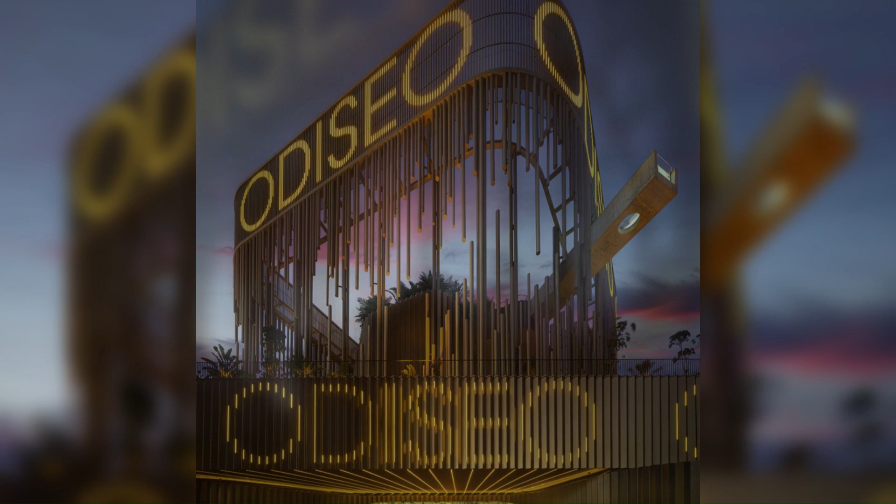Odiseo Gastronomic and Leisure Center by Clavel Arquitectos in Spain. Odiseo is the result of the desire to create a big urban leisure complex, which wants to become a reference, not only for the city of Murcia, but for the entire southeast region of Spain.

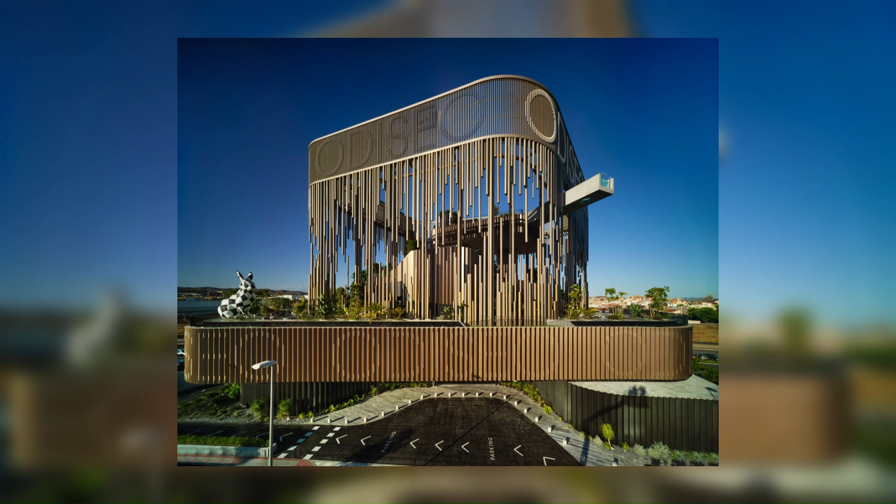Covering a total built area of 15,500 square meters, the building houses 2 restaurants, a nightclub, a performance hall, a casino, and a sports bar, as well as 2 parking levels underground.

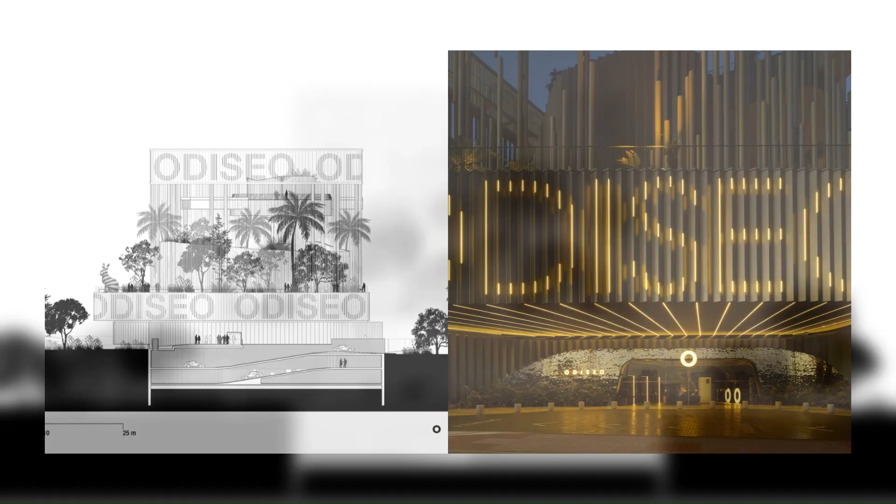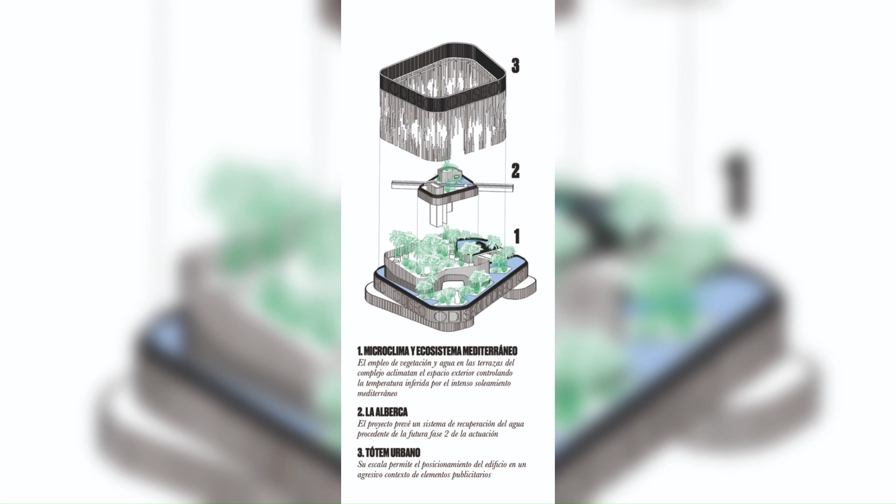Located in one of the main entrances to the city, surrounded by high-speed roads, where the landscape is dominated by the billboards and logos of shopping malls and other businesses, the building seeks to make itself visible without appealing for external sign poles, becoming a colossal totem that houses air and vegetation, designed to be appreciated in motion and from a 360-degree angle.

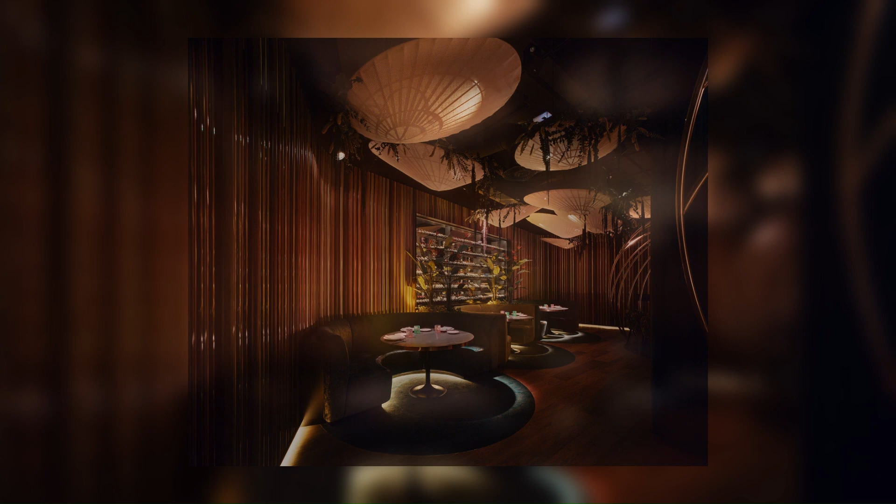On the other hand, and assuming the essence of the main use of the building, a leisure center, the project pursues the user experience as a fundamental objective, from the purely sensorial, comfort, the sound of water, reflections, textures, to the psychological, curiosity, amazement, expectation, surprise, smile.

Based on these guides, the building is made up externally by a 2-level plinth, slightly shifted from each other, generating a large terrace on its roof, where a pavilion for a restaurant is placed.

Above this appears the totem, a large latticework of metal tubes supporting the sign that crowns the building, and a raised terrace crossed by a cantilevered pool on both sides, which, by leaning only on 2 central concrete cores, overhangs up to 22 meters.

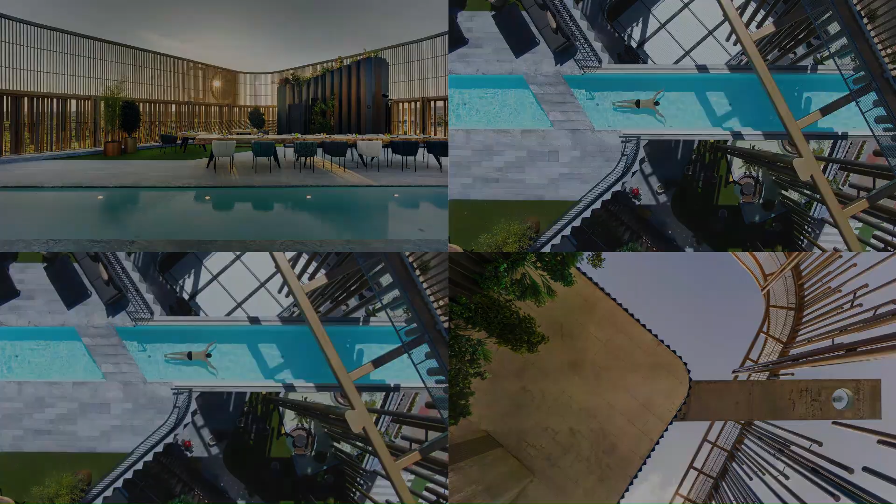A challenging and complex structural design, where singular resources become conventional, is ultimately used to generate an elevated forest, water features, vegetation, shade, ventilation, combined to create an ecosystem that defends the building from the strong climate of one of the sunniest cities in Europe, very focused on tourism.

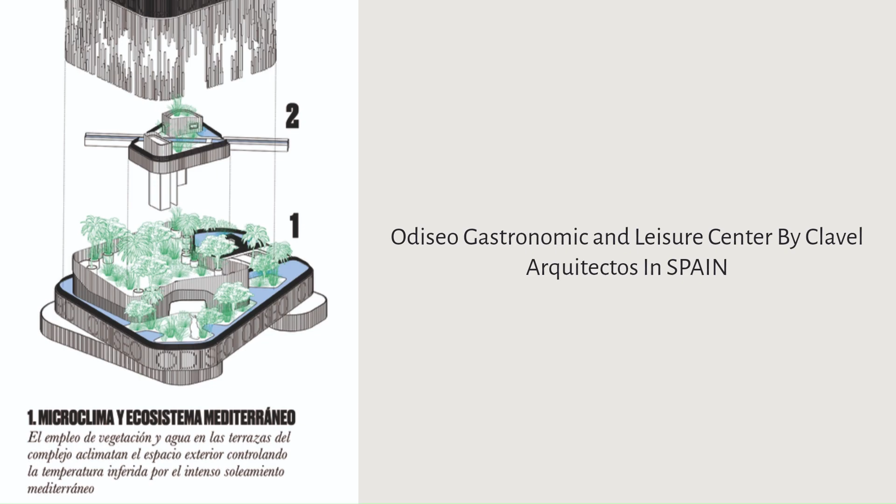Inside, an extremely careful design generates independent worlds, juxtaposed with each other, led by the restaurant space. Taking the Mediterranean as a starting point, which also guides its kitchen, and Greek mythology as its most essential representation,

an accumulation of textures, woods, gold and bronze, natural fibers, velvets, artisan ceramics, blended under deeply warm lighting, transmit to the user different perceptions of the beauty of this concept.

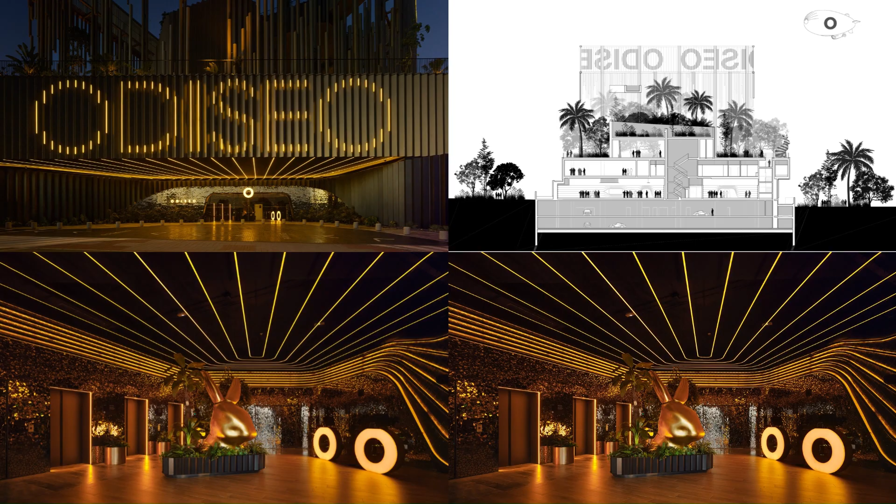The construction, financed exclusively with private money, has counted to a large extent on local talent and workers, based on a spirit of economic responsibility with the small city in which it is located, badly hit by the previous crisis.

Architecture, communication, and nature overlap to give character and livability to a previously inhospitable and charmless area of the city, creating an urban oasis with a domesticated climate open to all citizens.